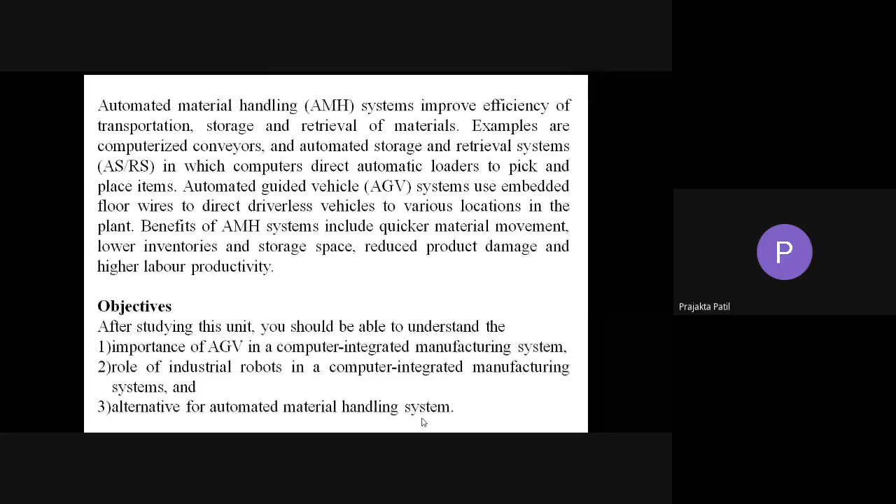Why use automation in material handling? The reasons for automation are already known to us. In the very first unit, you must have already come across the reasons why we go for automation. Similar are the reasons why we automate the material handling system. Whenever automation is applied anywhere, it gives benefits along similar lines.

Why use automation in material handling? It will help increase labor productivity, reduce labor cost, mitigate the effect of labor shortages, reduce or remove routine manual and clerical tasks, improve worker safety, improve product quality, reduce manufacturing lead time, and accomplish what cannot be done manually. I'm not going to talk much about these uses, as these points are already discussed elsewhere, and these are the most important reasons why a person goes for automation.

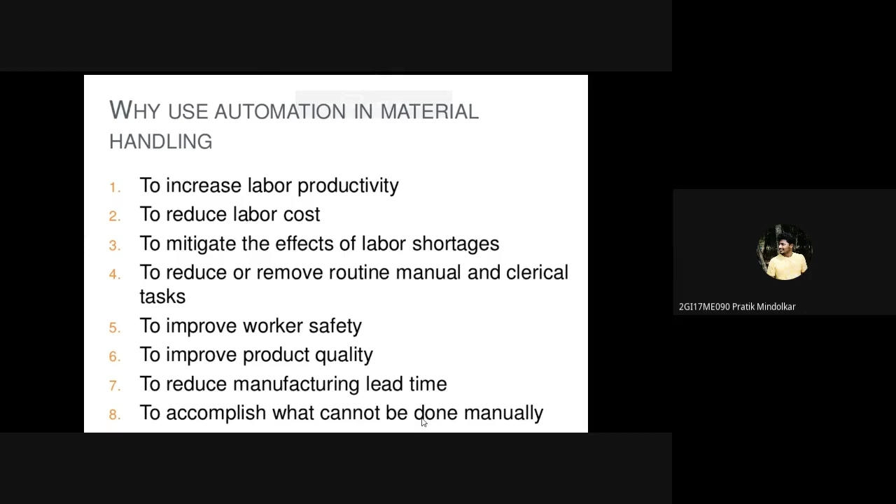Material transport equipment: we have different types of equipment used in industries. A few are listed here, maybe more can be added. The ones listed here are industrial trucks, AGVs (automated guided vehicles), robots, monorails and other rail guided vehicles, conveyors, cranes and hoists.

Industrial trucks you all know what these are. We will be studying AGVs, and we know how robots are used for material transport. We have monorails and other rail guided vehicles; if you see some mining units, you will see these rail guided vehicles. Monorails are also those arranged overhead on the roofs, with a complete frame, and material transport is done with the help of these monorails. We know what conveyors are.

We are also aware of what are cranes and hoists, and we'll be seeing all these as and when we proceed with our discussion.

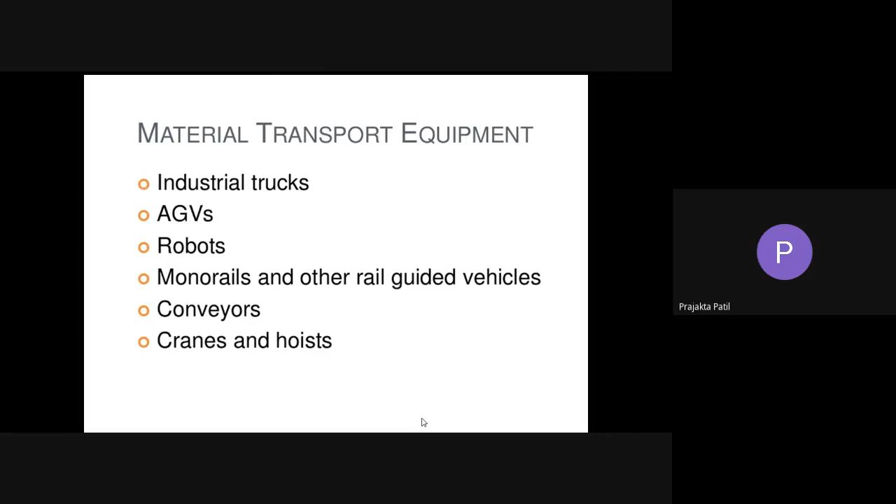So for us, AGVs is most important in this particular unit, that is automated guided vehicles. So what are these automated guided vehicles? What is AGV?

This is a very important definition of AGV. You all have to either note down this definition or remember it correctly. First of all, the words which are in bold are very important when you talk about AGVs. So AGVs are material handling systems which are independently operated, self-propelled, and guided along a defined pathway.

When I talk about an automated guided vehicle, it will be moving on its own. There is nobody controlling it directly. Of course there is a system in place which is controlling it, but you will not see a human being actually operating it, or a driver present who is going to help the AGV move ahead. It is going to be a self-propelled vehicle, but there has to be a defined pathway for the AGV to move. So if there is no defined pathway, the AGV will not be able to move or operate.

So AGV requires a defined pathway. You have to program the AGV such that it will follow the path that you have laid down. If you consider a plant in which you want the AGV to move from one location to another, you have to define a path for that AGV to move from that location to the other. So AGV is a system that uses independently operated self-propelled vehicles which are guided along defined pathways.

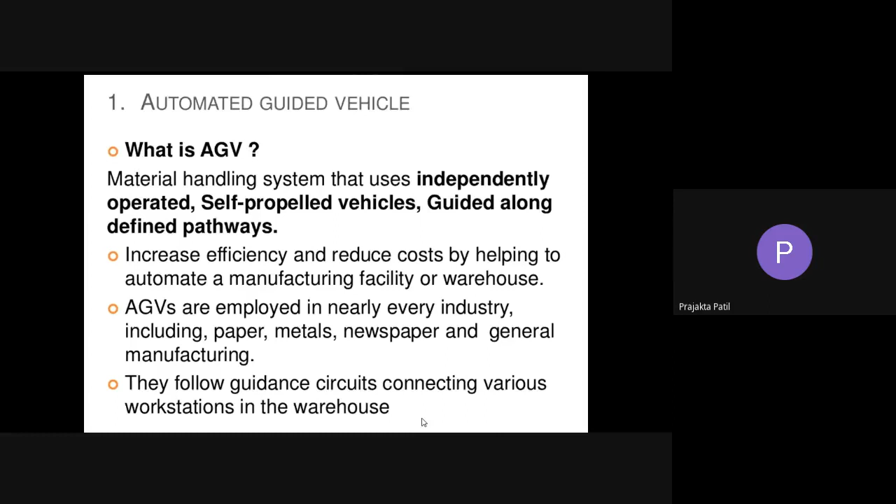Moving on, automated guided vehicle systems, commonly known as driverless vehicles, are turning out to be an important part of an automated manufacturing system. When we talk about computer integrated manufacturing, where automation is a major concept, AGVs are playing a very vital role in most industries today. You will see these automated guided vehicles in place, moving materials from one place to another.

With the shift from mass production to mid volume and mid variety, flexible manufacturing systems are increasingly in use. These systems are very much beneficial compared to other types of manufacturing systems, because in a flexible manufacturing system, the system will be flexible enough to accommodate any changes made to the product, and also able to provide the production quantity as required. So flexible manufacturing systems are increasingly in use, and all of these actually require automated material handling systems.

They require not only machine flexibility, but also material handling, storage, and retrieval flexibility. By using AGVs, you help gain this material handling flexibility. Hence the importance of AGVs has grown manifold.

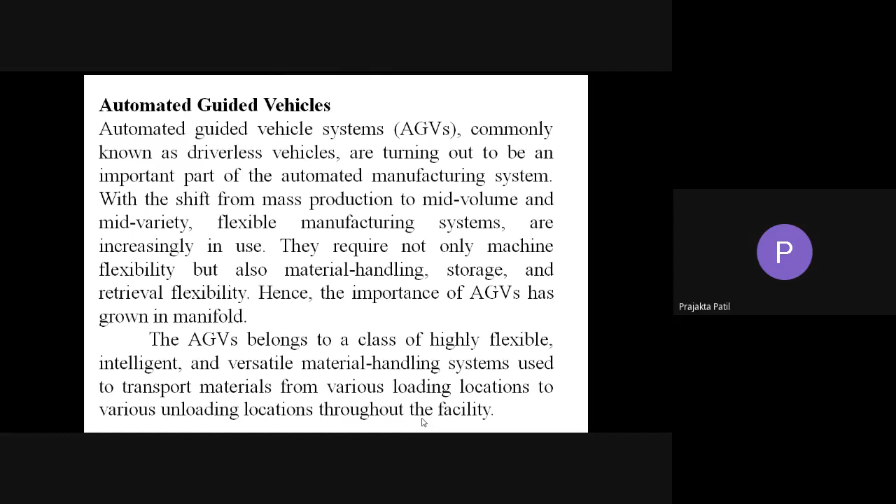So these material handling systems are going to help you transport the materials from various loading locations to various unloading locations. So, what are the components of AGVs?

There are four main components of an automated guided vehicle system: the vehicle itself, which is used to move the materials within the system without a human operator, and the guide path. AGV cannot be possible if there is no guide path, which will help guide the vehicle to move along the path.

Then the control unit. As everything is automated, there has to be something which controls it, with the help of which the AGV can move. This control unit monitors and directs the system operations, including feedback on moves, inventory, and vehicles.

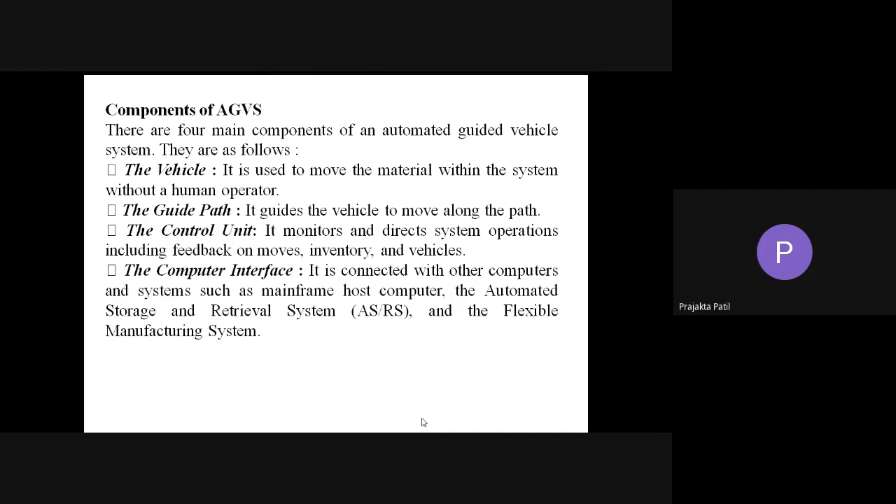Next is the computer interface. It is connected with other computers and systems such as mainframe host computers, the automated storage retrieval system, and the flexible manufacturing system. Since the AGV is part of the complete system, it cannot move independently without being integrated into other systems in the facility. So AGV should have these computer interfaces which help it connect with other computers and systems in the facility. So the components of AGV are: vehicle, guide path, control unit, and computer interface.

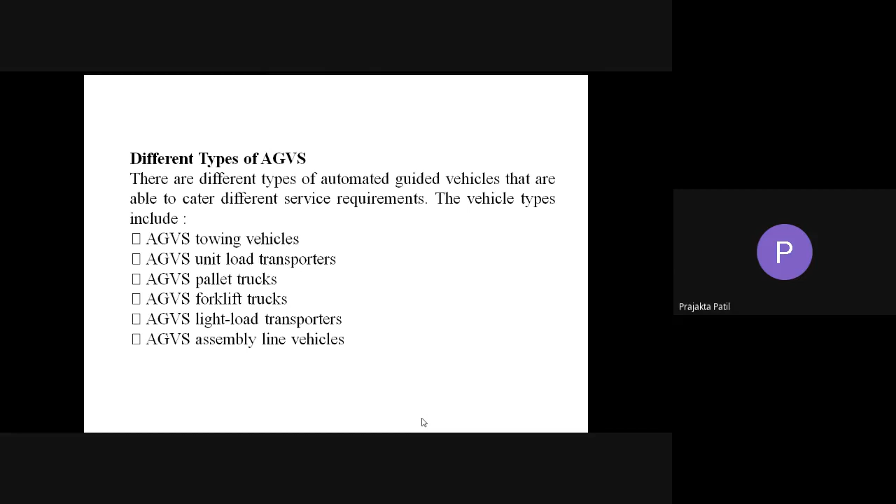Different types of AGVs. There are different types of automated guided vehicles that cater to different service requirements. The vehicle types include towing vehicles, AGV unit load transporters, pallet trucks, forklift trucks, light load transporters, and assembly line vehicles. There are a number of different types of AGVs in place.

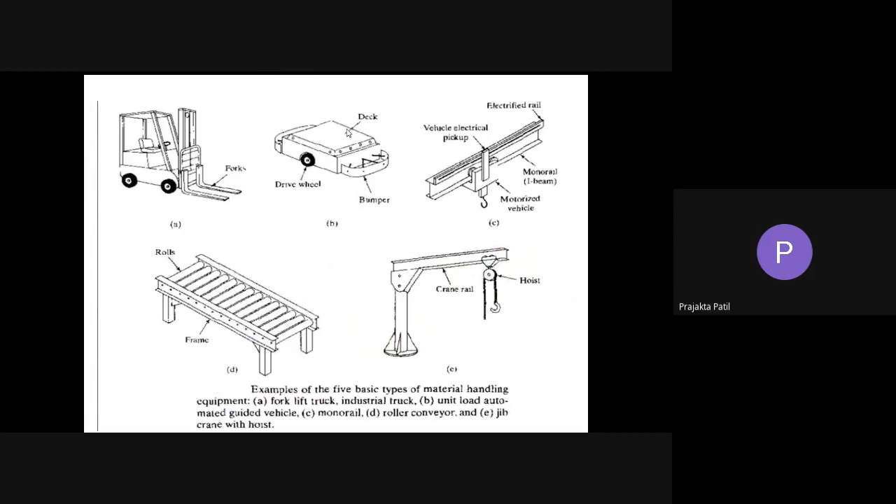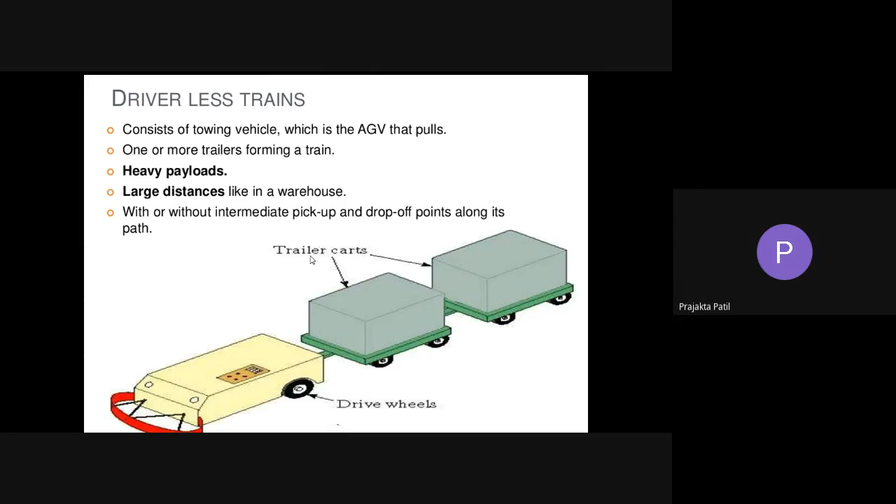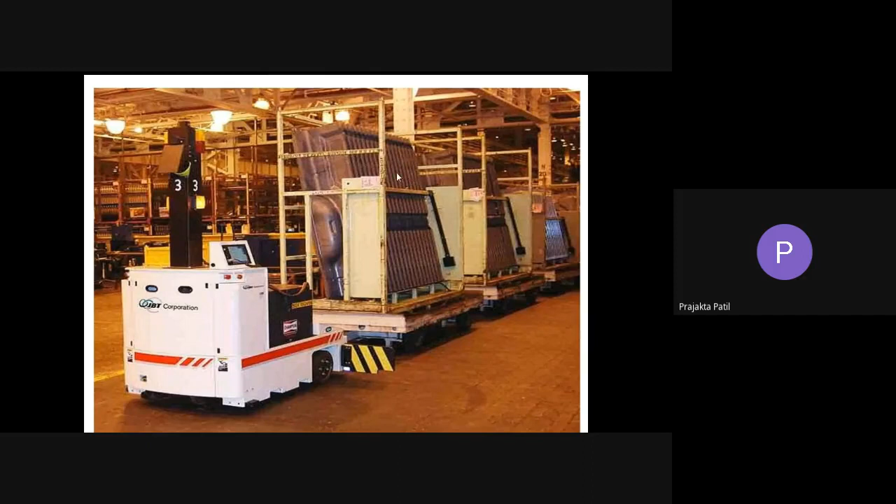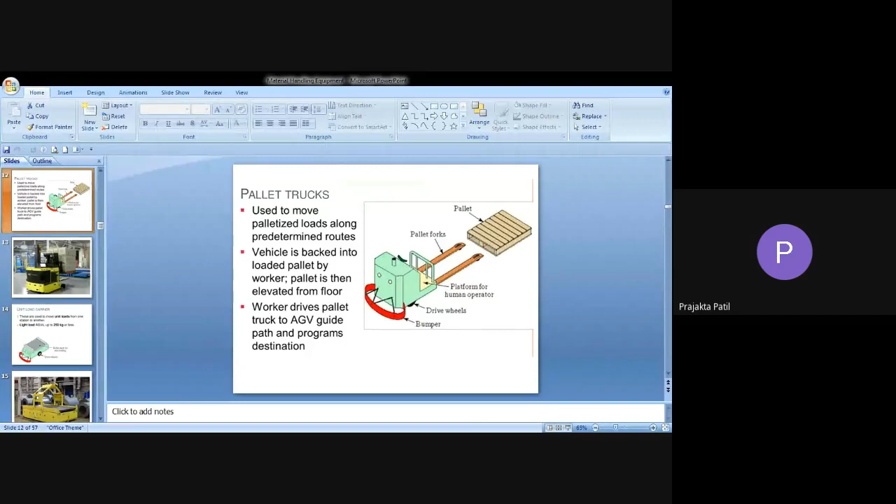Yeah, am I audible? Yes, ma'am, okay. Slide is visible, right? Yes.

So next is this pallet truck, the most common material handling equipment you will see in the industries. Even if you go to any of the local industries, you can see such equipment. Maybe a slightly different design, but similar kind of trucks are seen in most of the industries around, even in Belgaum here. So these are used to move palletized loads along the predetermined routes.

The pallet is here - this is a pallet on which all the parts are going to be stocked up. If you imagine some small parts which are loose and not packed properly, it will be difficult to place them on this pallet, because there are chances of those parts slipping and falling down anywhere. So these pallets are very useful when you have all the parts that have to be moved from one location to another. They should be all stocked up properly on this pallet - only then you can move it.

So packing is very important here. These pallet trucks are used to move the palletized loads along the predetermined routes. The vehicles are backed into the loaded pallet by workers, and the pallet is then elevated from the floor. So you can see there's a pallet fork here, and a driver platform for the human operator. This is a drive wheel that you see, and this is a bumper - it will help protect the vehicle from bumping into obstacles that are there in front.

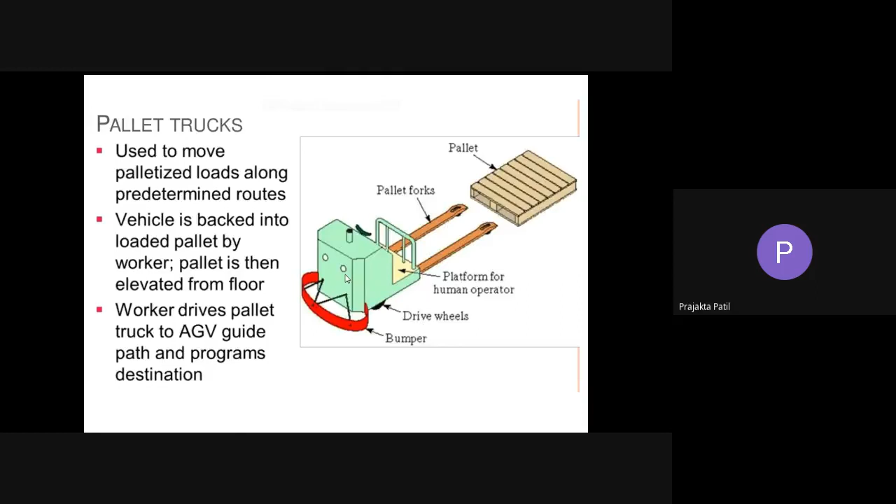So here you have provision for a human operator. There are some AGVs which will not have provision for a human operator - once loading is done, the AGV will follow the guided path and move from one location to the other. So you can see here, this is a pallet truck.

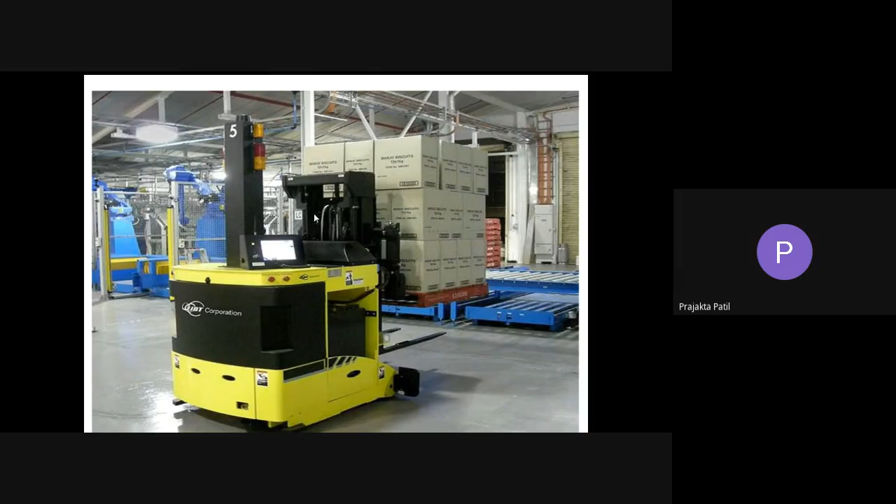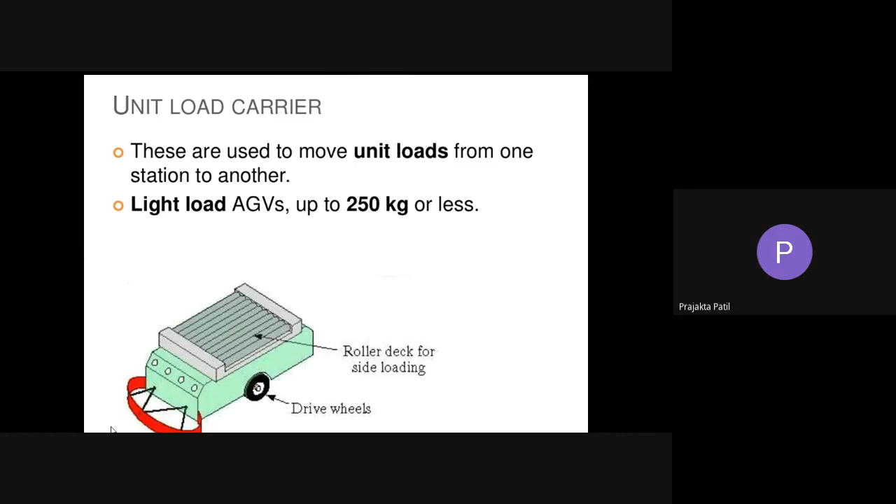So this is also a type of AGV. Here you can see this is a type of AGV, that is a unit load carrier.

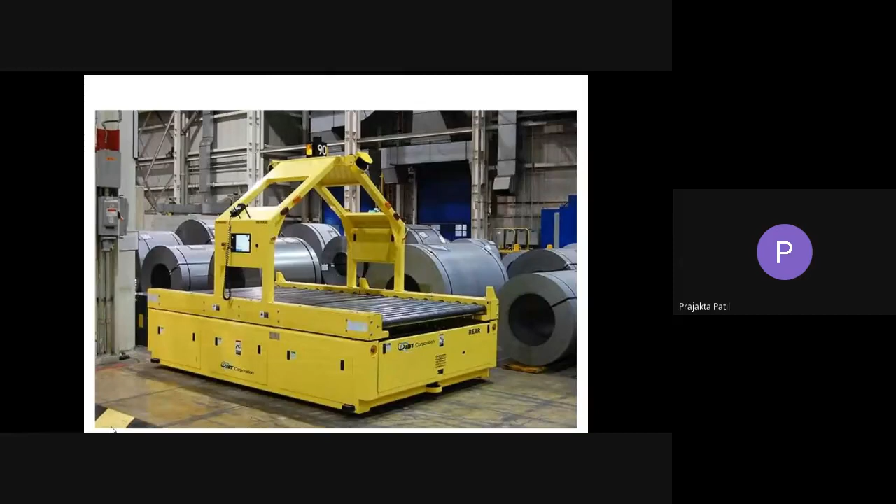Next is forklift truck, which we have already seen. You have the driver who will be moving it, and then there is the towing tractor, which we have also seen. So all of these, the forklift trucks, they are all human operated, or you have the person moving it from one place to another. They are not completely automated.

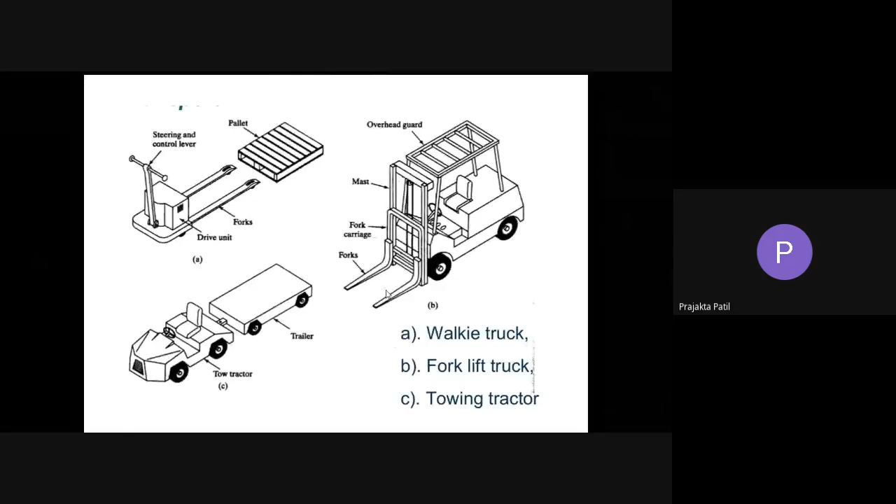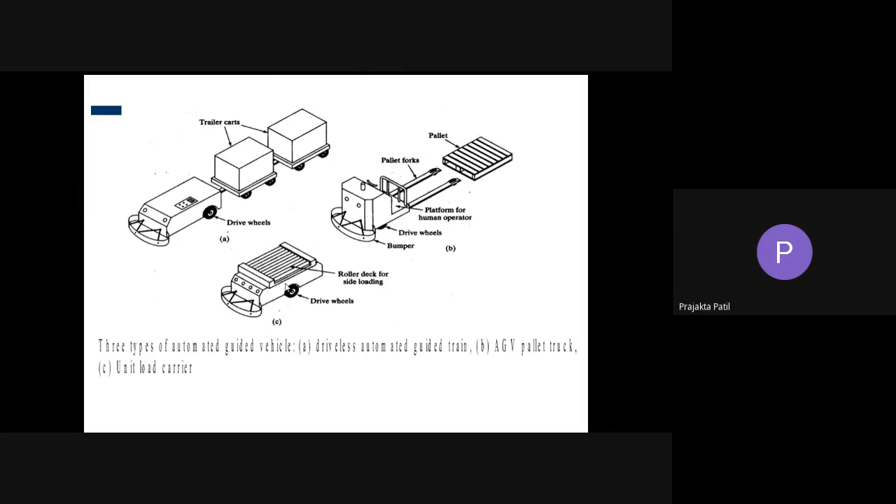A very important part about AGV is vehicle guidance. Vehicle guidance is very important because the AGV machine is in place, but how is it going to move if you are not going to show it a defined pathway? There are very less chances that the AGV can move on its own. So the vehicle guidance is very important here.

The guidance system is the method by which the AGV's pathway is defined and vehicles are controlled to follow that pathway. So the primary objective of a guidance system is to keep the vehicle in a pre-designated path. These control systems help you maintain or keep that vehicle on that particular pathway. The main advantage of AGV guidance is that the guide path can be changed easily at low cost compared with the high cost of modifying fixed path equipment such as conveyors, chains, and tow lines.

We know all these conveyors, chains, and similar systems are also material handling systems, but these are fixed. You cannot change them once you lay them. If you want to change the location of pick and drop of that particular part with a conveyor, it's very difficult because conveyors are quite rigid, not flexible enough. Once you lay them, they stay fixed. Whereas if you consider an AGV as a material handling system, the AGV just has to have a defined pathway, and it will follow that. So if you want to make changes, it can easily accommodate because it is the path that has to be changed, and the AGV will just follow that path.

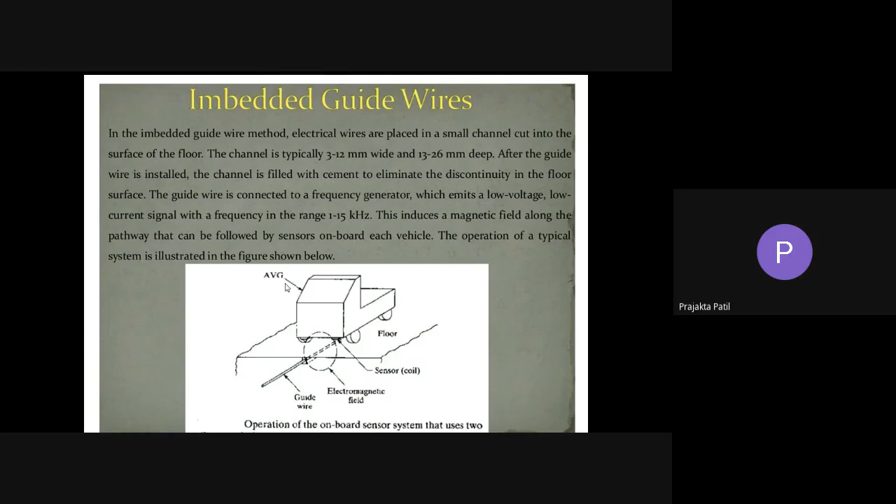This embedded guide wires is a very interesting vehicle guidance system or vehicle guidance technology, as we call it. You can see the figure here, it is shown.

On the floor, usually what they do is they cut the floor such that it will be around 3 to 12 mm wide and around 13 to 26 mm deep. So you can see there's kind of a groove that will be cut into the floor initially, and in that particular groove, you have a guide wire placed. This is connected to a low voltage, low current with frequency generation of around 1 to 15 kilohertz.

And then you have sensors placed on these AGVs, which will be sensing the electromagnetic field given off by this guide wire. So based on the sensors and the guide wires in place, the AGV will be following the path. These embedded wire guided vehicles are faster and safer, more accurate, less costly, simpler, and less programming required. So if you actually see this, there is very less programming required.

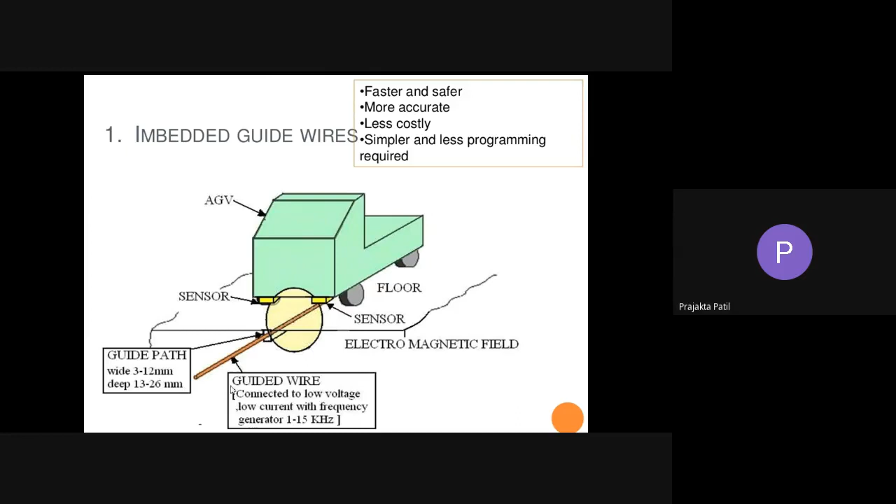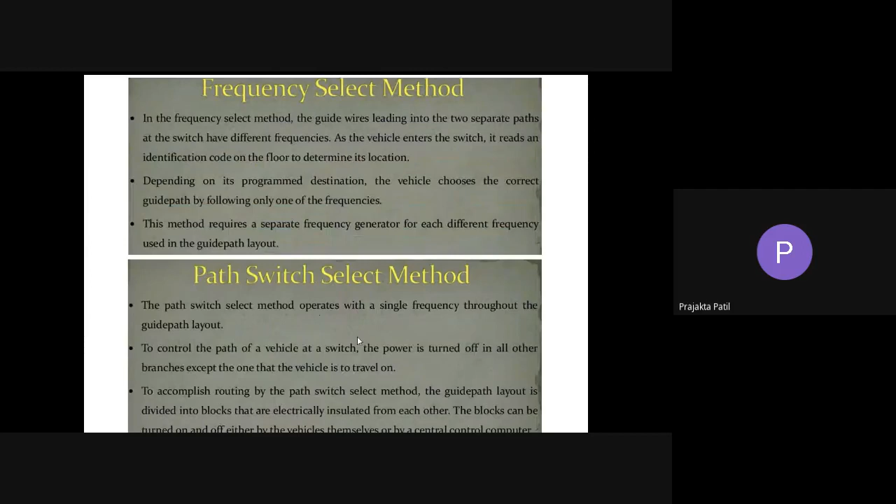So all the paths on the floor will have different frequencies. Okay, not necessary that all the paths are going to have the same frequency. So depending upon which method you select, you will have the frequency change seen. Like for this method, that is frequency select method, all the paths will be having different frequencies. But if you consider this path switch select method, the complete route is going to have one single frequency. So it depends upon which method you want to choose.

So here in the frequency select method, the guide wires leading into the two separate paths at the switch have different frequencies. As the vehicle enters the switch, it reads an identification code on the floor to determine its location. So depending on its programmed destination, the vehicle chooses the correct guide path by following only one of the frequencies. So this method requires a separate frequency generator for each different frequency used in the guide path layout. So I hope this is understandable.

When it comes to vehicle guidance, straight line movement, okay, fine, you can just have a single frequency. But if you have to branch out, if you want to take a different turn, if you want to go in a different direction, that time how will you control that AGV? Okay, in that case you can go for this frequency select method, where every path that it has to follow will have a different frequency, and it will follow the program. In the program of instructions, you will tell it which frequency it has to follow, and accordingly it will change its direction in order to meet the location.

Next method is the path switch select method. The path switch select method operates with a single frequency throughout the guide path layout. So may there be any number of branch outs, like maybe there are these different turns it has to take in that plan, all the paths are going to have one single frequency throughout the layout. To control the path of a vehicle at a switch, the power is turned off in all other branches except the one that the vehicle is to travel on.

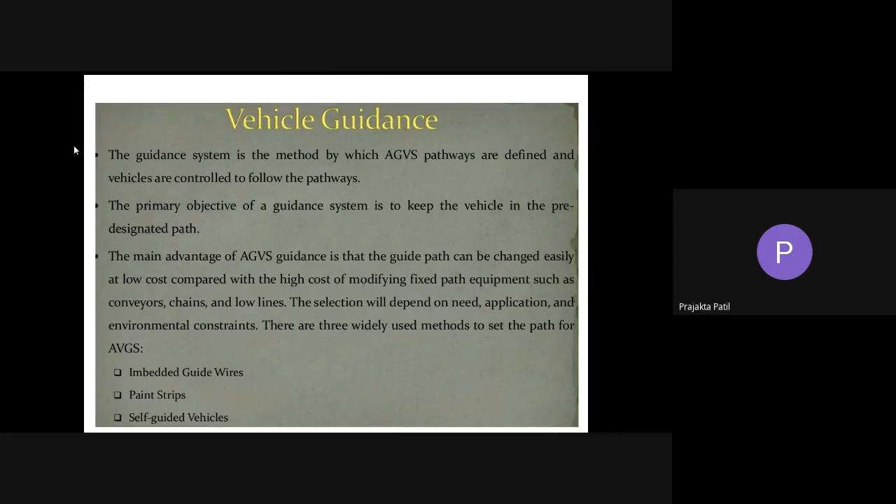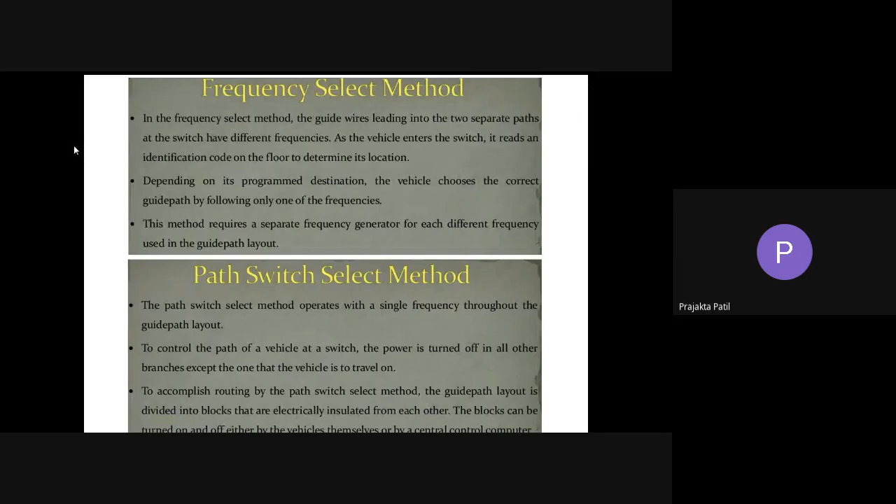So, in this vehicle guidance technology, you have embedded guide wire, paint strips, and self-guided vehicles. So, this is the first one, that is embedded guide wires. In embedded guide wires, these are the two types: frequency select method and the path switch select method. So, choosing the appropriate path in a wire guided system, these are the advantages of one over the other. The frequency select method uses different frequency generators for different paths, whereas the path select method has the same frequency.

In the frequency select method, the guide wires leading into the two separate paths at the switch have different frequencies. Here, at the switch, power is turned off in all the branches except the one that the vehicle is to travel on. In the frequency select method, at the switch, the vehicle reads the identification code of the destination frequency and follows it.

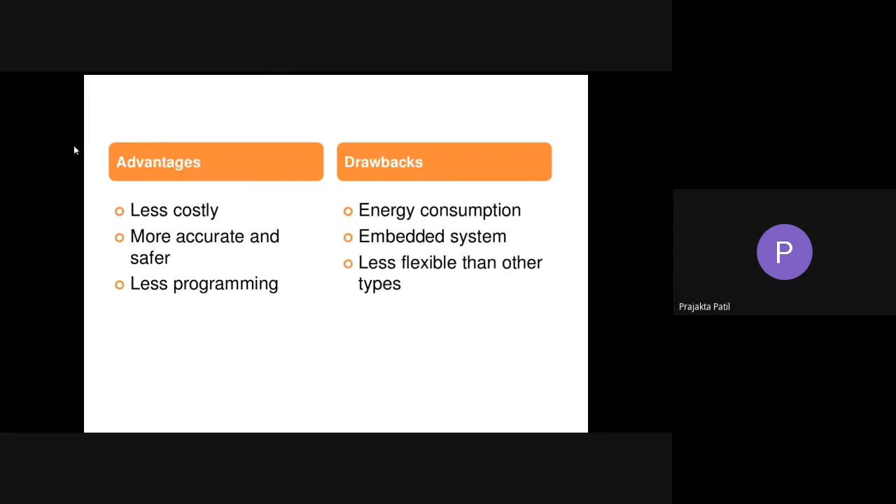So, advantages and drawbacks of the same. You can just read this. The next method, or the next guidance technology, is the paint strips. That is the optical navigation system here. These are very interesting again, and simple as compared to the embedded wire system. You do not have to actually make any channels in the floor.

You just have to place a tape, or maybe you can have some paint on the floor, and you can have these sensors which are optical sensors, or the UV sensors, which are going to be placed on the AGVs such that they can sense them. So you have these chemicals or tape strips which are fixed or painted to the floor, which contain fluorescent particles which will be reflecting the UV light sources from the vehicles.

So in that paint, or the strips that you're going to place in order for this AGV to follow it, you are going to add some fluorescent particles such that whenever UV light falls on that fluorescent particle, it reflects the light back, and that light will be sensed by the sensors on the AGVs, and that in turn will help you to follow a certain path. So vehicles have an onboard sensor which allows it to detect the path. You'll have these optical sensors in place.

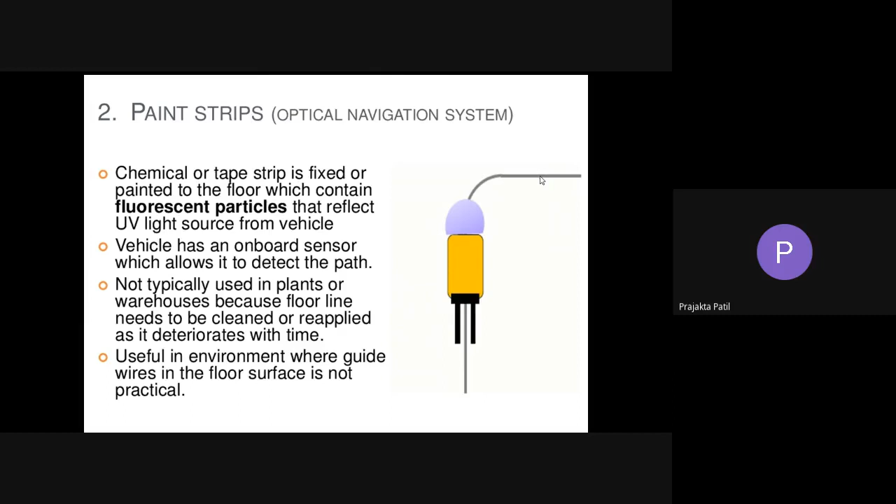So the most preferred one would be these embedded guide wires, which can be used in any form of industries, whether it's clean or very dusty, you can use those. But in case you cannot use the embedded wire, you can use the paint strips. Again, it has the constraint that it should have a very clean environment at work. Only then can you use these paint strips. Advantages and drawbacks, you can just go through later. I'll share this PPT in the classroom.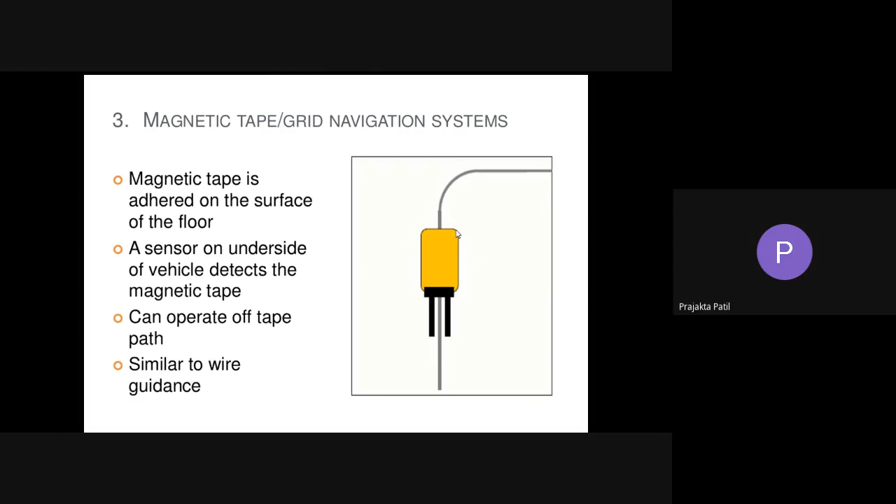Next is the magnetic tape or the grid navigation system. Magnetic tape works similar to our paint strips or the embedded wires, but here we are using magnets. So magnetic tape is adhered to the surface of the floor. In place of your paint or the embedded wire, you have magnetic strips which will be pasted on the floor. The sensors on the underside of the vehicle detect the magnetic tape. These can operate off the tape path, and these are similar to wire guidance.

Last is the self-guided vehicles. Self-guided vehicles, that is SGVs, represent the latest AGV guidance technology. In guidance technology, as I said, first is embedded wire, second is paint strip, and the third is the self-guided vehicles. Unlike the previous two guidance methods, SGVs operate without continuously defined pathways. In industries, you will not even see the pathway. There is no predefined pathway for it. This is a latest development in AGVs.

But of course, there has to be some system which will help it to move, something which will be controlling it. It may not be the pathway, but there has to be something which will guide the AGV to move from one location to another. And what is that? They use a combination of dead reckoning and beacons, which are located throughout the plant, which can be identified by an onboard sensor.

So, what is dead reckoning? It refers to the capability of the vehicle to follow a given route in the absence of a defined path in the floor. Whereas beacons means a fire or light set up in a high or prominent position as a warning or a signal. So these are basically locations in the layout which help guide the SGVs to move from one location to another. So the advantage of self-guided vehicle technology over the fixed path is its flexibility.

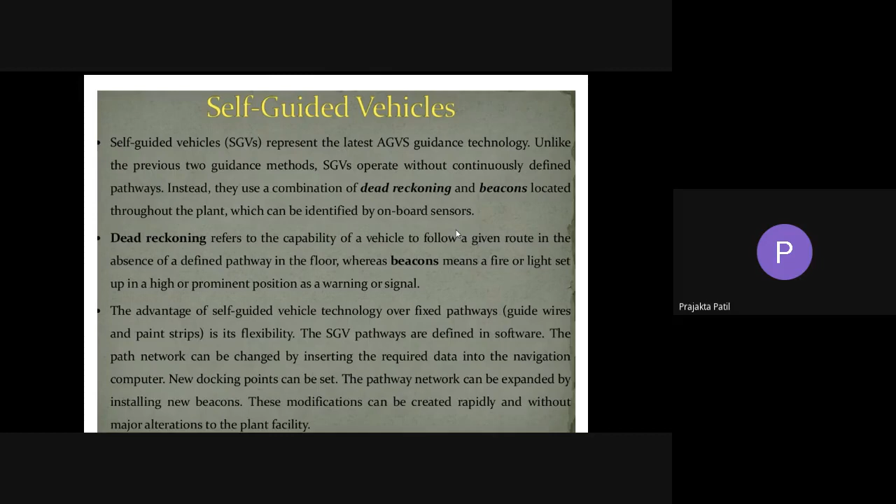So SGVs are the most flexible type of AGVs. They do not have any constraints or restrictions with respect to the pathway. They can move anywhere in the plant, provided they have dead reckoning and the beacons in place, which will guide them in moving from one place to another. All of this is defined in the software itself. Any changes you want to make can easily be done just by giving instructions in that particular program. So these are the self-guided vehicles.

Next is vehicle routing. In a factory, the path followed by AGVs may be complex. We know it's not always going to be simple, and factory layouts can be very huge. These plants may contain multiple loops, branches, side tracks, along with loading and unloading points. So routing refers to the ability of the vehicle to select one among several potential pathways to move to the destination point.

This vehicle routing we have already studied, just under a different topic, so we are discussing the same points. We already saw how, if you have any turns and tracks to be changed, that can be done, using two methods: the frequency select method and the path switch select method. As we have already discussed this, I'm not going to talk about it again.

So just know that in vehicle routing, there are two important techniques: the frequency select method and the path switch select method. Whenever an AGV approaches a junction of two paths, a decision has to be made by the vehicle to decide the path it has to follow. This particular point is called the decision point of the vehicle. So that's about vehicle routing.

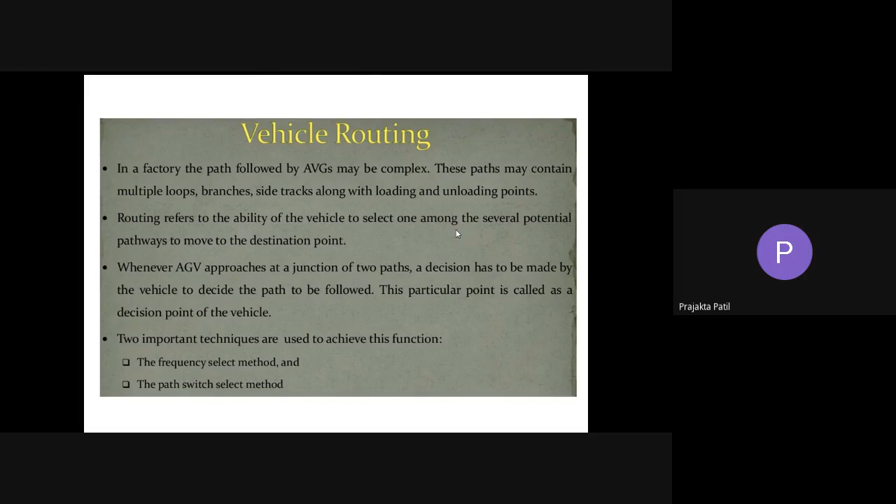Next important thing is traffic control. It's not always just one AGV moving in the complete layout—there will be a number of AGVs, possibly of different types. So how will you control the traffic? Just like our regular traffic on the road, where there are a number of vehicles moving around. The intensity, of course, is not that much, but there are a few vehicles moving, and they're all driverless—there's nobody actually looking at it.

There is no driver; it is all getting controlled on its own with the help of these control systems. But there has to be some traffic control also. The purpose of traffic control in an automated guided vehicle system is to minimize interference between vehicles and to prevent collisions. There are two methods of traffic control used in commercial AGV systems: onboard vehicle sensing and zone control.

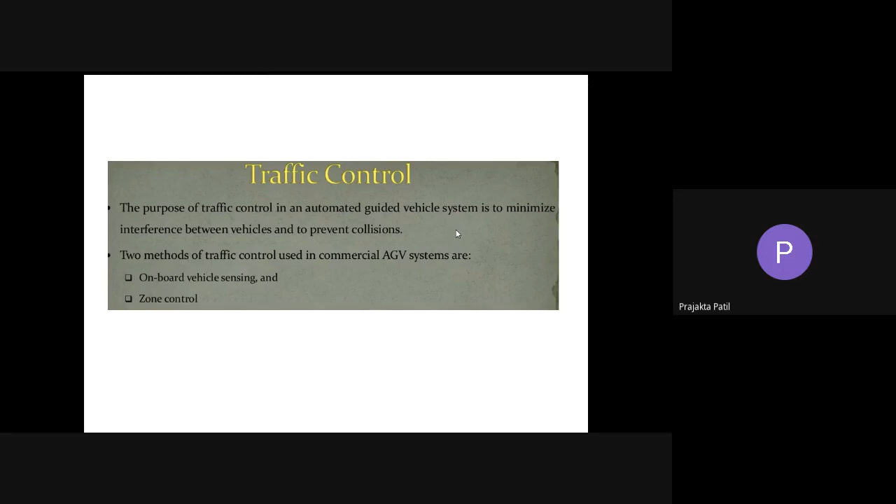Another important question is, how can the AGV traffic be controlled in a layout? One way is onboard vehicle sensing, and the other is zone control. Let's see what these two are. Onboard vehicle sensing is also called forward sensing, which involves the use of one or more sensors. Let me explain what onboard vehicle sensing is.

Onboard vehicle sensing means there will be sensors placed in front of the vehicle, at the front portion, and any obstacle that comes in front will be sensed by the sensor, which will not allow the vehicle to move ahead. That obstacle could be anything—some part in the layout, a human being standing there, or another AGV in front. The sensors will sense that and stop the vehicle. Once the obstacle is removed, it will start moving again. So there is a predefined path that it is following.

Once it is following that predefined path, that doesn't mean it will just go on. It has to check safety too. In order to have safety in place, you have this onboard vehicle sensing system, where sensors are placed in front of the vehicle. That is the forward sensing.

Onboard vehicle sensing, also called forward sensing, involves the use of one or more sensors on each vehicle to detect the presence of other vehicles and obstacles ahead on the guide path. Sensor technologies include optical and ultrasonic devices. When the onboard sensor detects an obstacle in front of it, the vehicle stops. When the obstacle is removed, the vehicle proceeds. If the sensor system is 100% effective, collisions between vehicles are avoided.

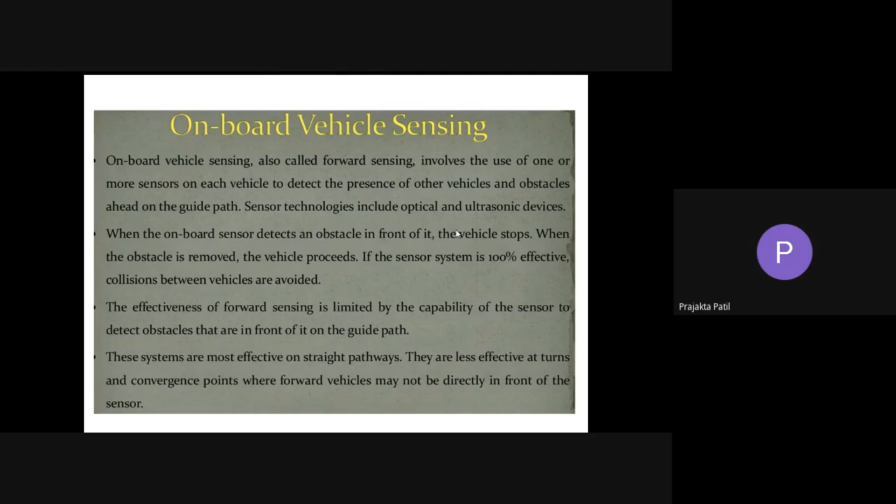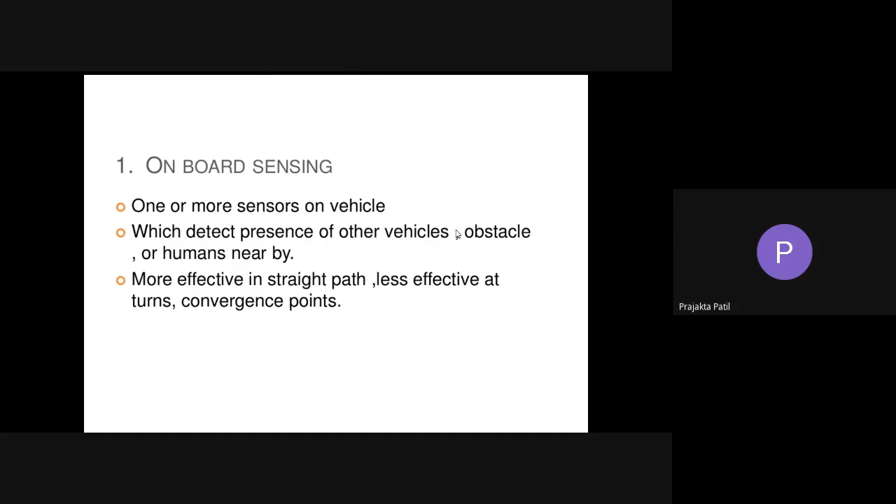The effectiveness of forward sensing is limited to the capability of the sensor to detect obstacles in front of it and on the guide path. These systems are most effective on straight paths. They are less effective at turns and convergence points, where the forward vehicle may not be directly in front of the sensor. So onboard sensing, with one or more sensors on the vehicle, detects presence of other vehicles, obstacles, or humans nearby, and is more effective in straight paths, less effective in turns and convergence points.

Zone control is yet another method of controlling traffic. In zone control, the AGV layout is divided into separate zones as an operating rule, and no vehicle is permitted to enter a zone if that zone is already occupied by another vehicle. So the length of a zone is at least sufficient to hold one vehicle plus an allowance for safety and other considerations. Other considerations include the number of vehicles in the system, the size and complexity of the layout, and the objective of minimizing the number of separate zone controls.

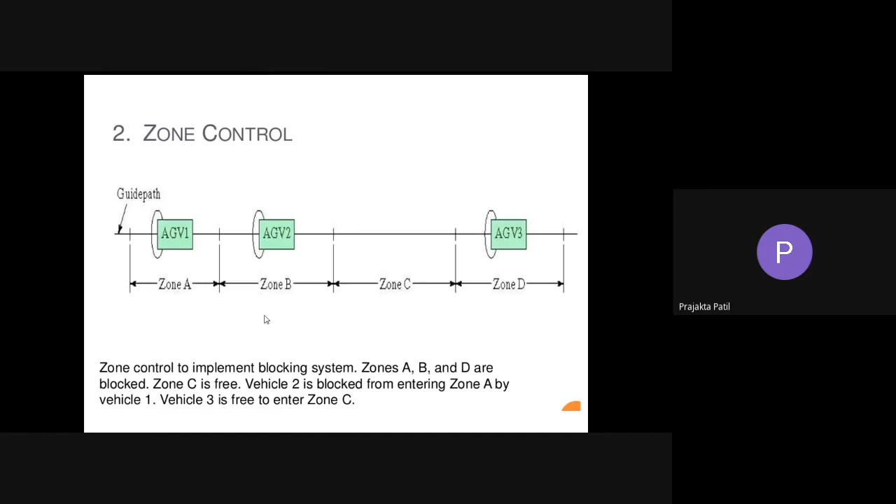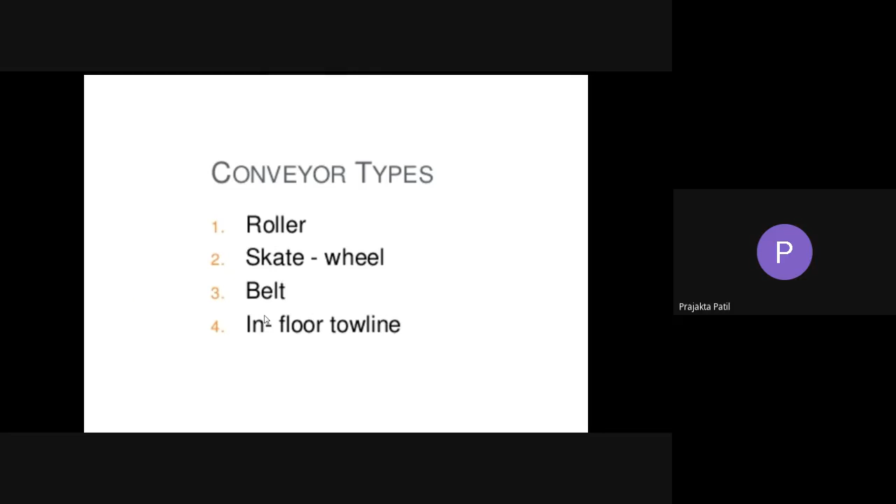So these are the two types of traffic control: zone control and onboard sensing. These are the different vehicle dispatching methods. As for conveyor types, we have already come across rollers, skate wheels, belts, and in-floor tow lines, so I'm not discussing those again.

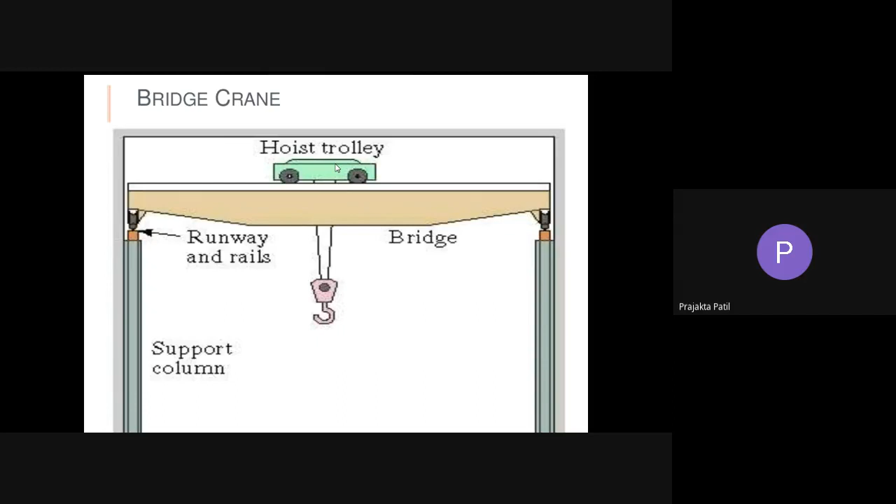Cranes and hoists: you have these frames in place, the bridges, and the runway guides here, this complete bridge. With the help of this hoist trolley, it can be moved along the layout. Gantry crane and jib crane are different types of cranes as well.

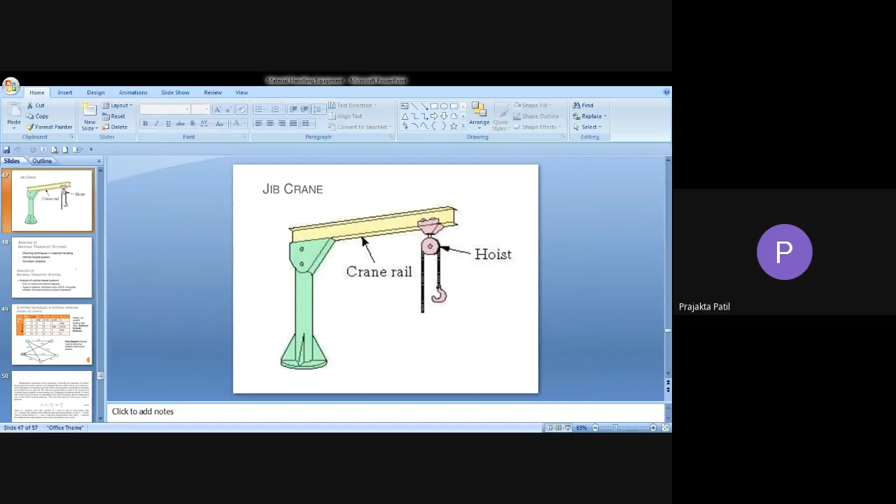Shall I continue and finish this part now, or do you want me to take the class again tomorrow? There's only the analysis part left, just a few equations to discuss, and then we can stop. So shall I continue, or do you want a class tomorrow? If I continue now, there will be no class tomorrow, and you can all start preparing for your test. If you don't want me to continue now, I can take the class tomorrow instead. Ma'am, continue. Okay.